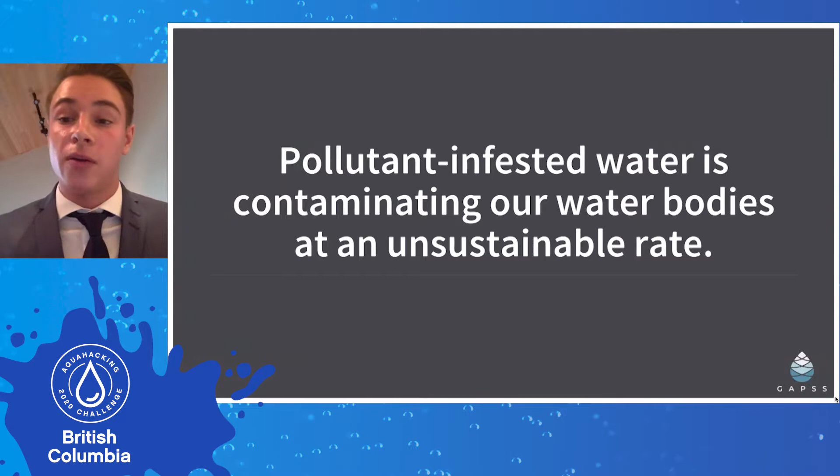But for those of you who live here, or are at least familiar with the Okanagan lifestyle, you know that it is more than just about beauty. The water supports life, it drives our economy, and it ultimately brings people together. But this reality is slipping away. With increasing infrastructure, more and more contaminated stormwater runoff is making its way into our sacred lakes. If we don't intervene now, our lakes could be forever changed for the worse. I'd like to hand it over to Rudy to further explain.

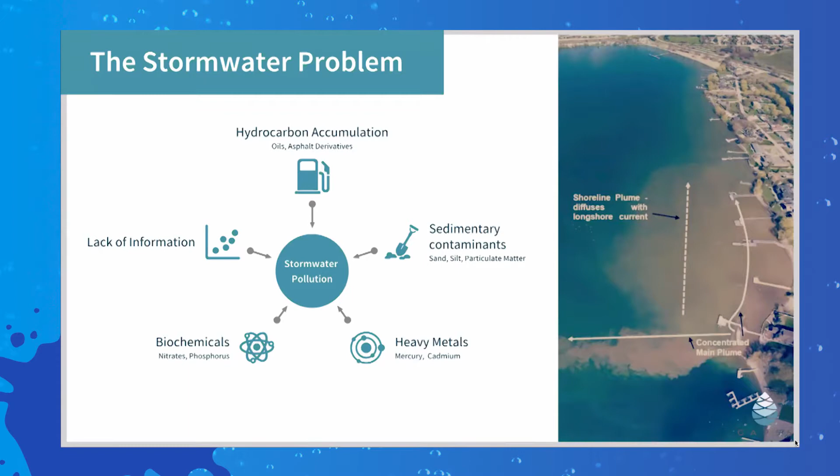So how did we get here? Naturally, stormwater from rainfall should soak into the ground where it joins aquifers. However, due to urbanization, the landscape of our cities has changed, and the introduction of impervious surfaces like concrete and asphalt have made it so that stormwater now flows through our streets where it collects contaminants before entering catchment basins and ultimately converging to central water bodies such as the Okanagan Lake in Kelowna, BC.

Now, hydrocarbons are a pretty obvious contaminant. However, sediment is often overlooked. Sediment is problematic for two main reasons. Firstly, sediment increases the cloudiness or turbidity of the water. This is bad for photosynthetic species which depend on sunlight to produce food, and thereby any other species which depend on them. Secondly, sediment acts as a transporter for other contaminants such as biochemicals and heavy metals that have a tendency to bind onto them.

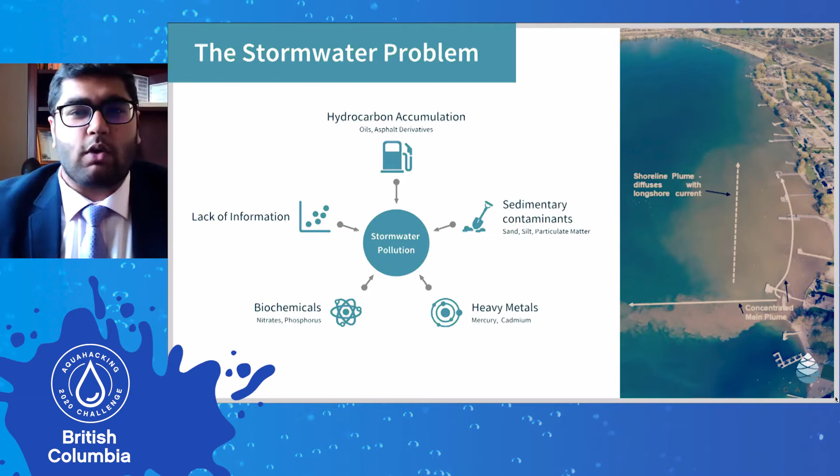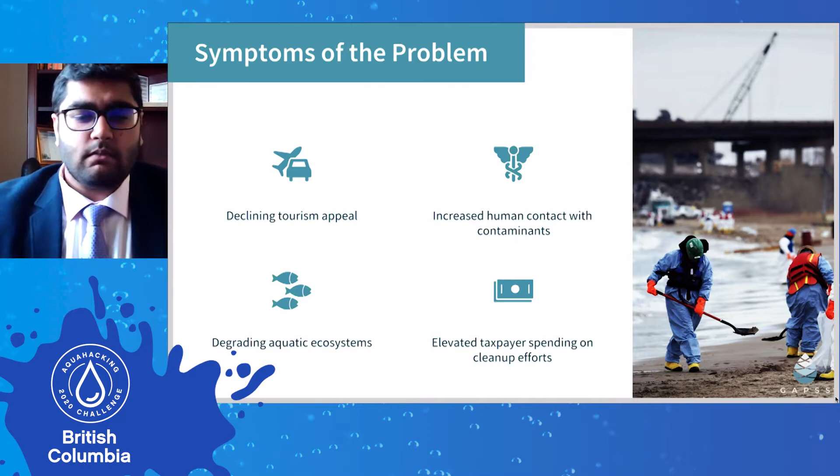Moreover, the lack of data regarding stormwater contamination makes informed decision-making currently impossible. If we continue to let this problem run without intervention, we will see declining appeal of our beautiful BC water bodies, increased human contact with contaminants in recreational lakes, and degrading aquatic ecosystems. Ultimately, taxpayer funding will be required for cleanup efforts.

We present to you our solution, GAPSS, a simple product that slides seamlessly into existing catchment basins. GAPSS performs three main functions. Firstly, it directly removes hydrocarbons from stormwater. Secondly, it directly removes sediment from stormwater and thereby is able to remove any sediment-mobilized contaminants. Thirdly, it records real-time data regarding turbidity and water flow rate through built-in sensors.

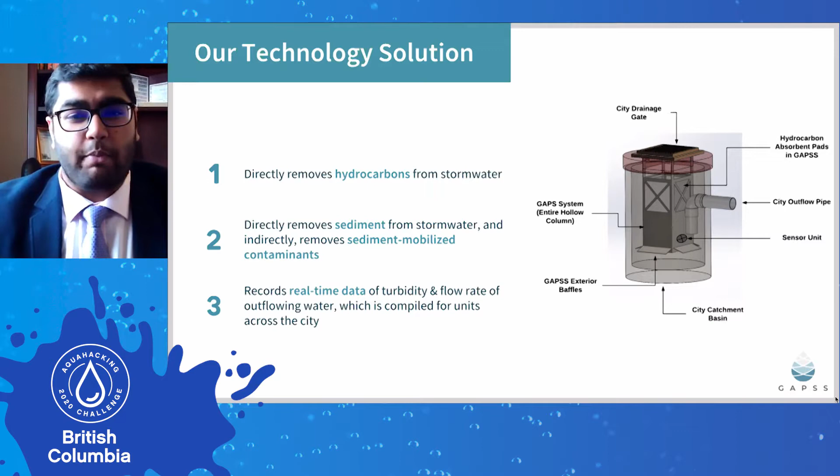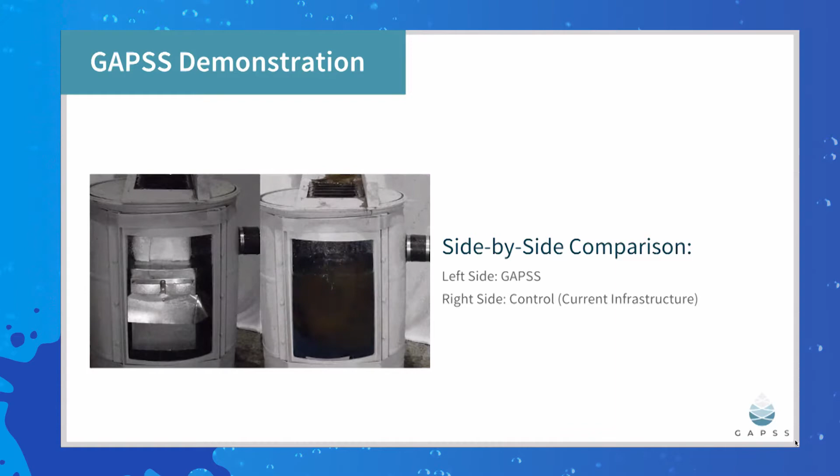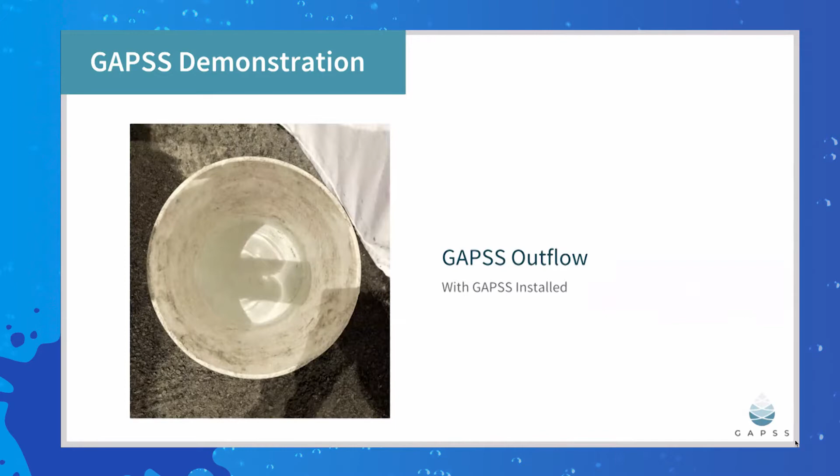A remarkable difference indeed. As social entrepreneurs, we strive to do the best for our society. And through GAPSS, we'll be able to deliver 50 to 80% cleaner water into our central water bodies. We'll be able to remove the contaminants as early as possible in the cycle. Because sediment transports other contaminants, removing sediment as early as possible has a compound effect.

GAPSS is affordable, which means it's accessible for all municipalities, not just the big ones. Therefore, we'll be able to maintain our pristine water bodies province-wide that drive our tourism-driven economy. The data we collect through GAPSS will lead to new stormwater management insights, and it will support critical environmental research.

Our solution is unique. Firstly, it's simple. There's no moving parts, very easy installation, and most importantly, it can be retrofitted into existing city infrastructure. GAPSS is affordable at only 10% the cost of our competitors, while still being effective as it removes 80% of sediment and up to 90% of hydrocarbons. We have synced the GAPSS maintenance cycle with the existing maintenance cycle for catchment basins, which brings the marginal cost for maintenance down to only $5 per unit.

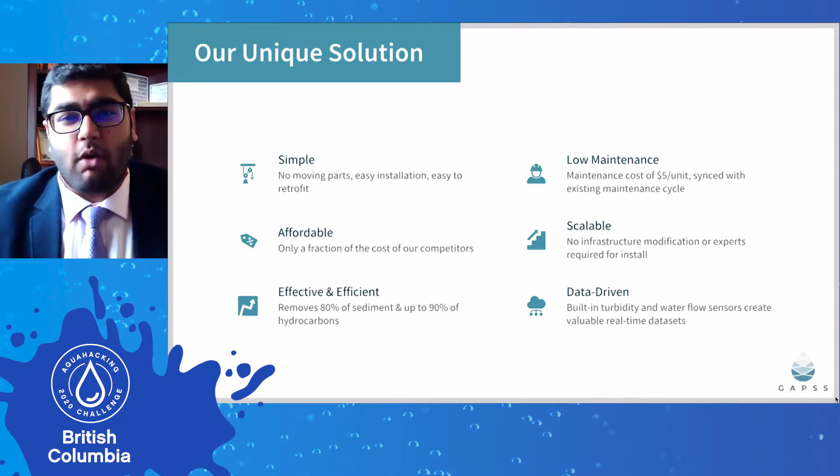GAPSS is scalable. It requires no infrastructure modification and can be deployed flexibly. You don't need to put one in every drain, just the high volume ones. GAPSS is also data-driven, and it's able to produce valuable real-time data sets where in the market there is none currently. I'd like to hand it over to Cole now.

In 2013, Kelowna's annual budget for stormwater management was $85 million. In 2020, BC's budget for environmental protection was $250 million. Our solution is a one-time investment at a fraction of this annual budget. Our business model revolves around two main pillars, the first of which being direct sales. Initially, this will be towards private clients, such as golf courses and resorts, looking to maintain their pristine water bodies. We will move into municipalities eventually.

The second pillar is data packages. These are subscription-based and will be sold annually. The data packages will go towards research groups, environmentalist groups, and government agencies, those who currently lack access to this vital data.

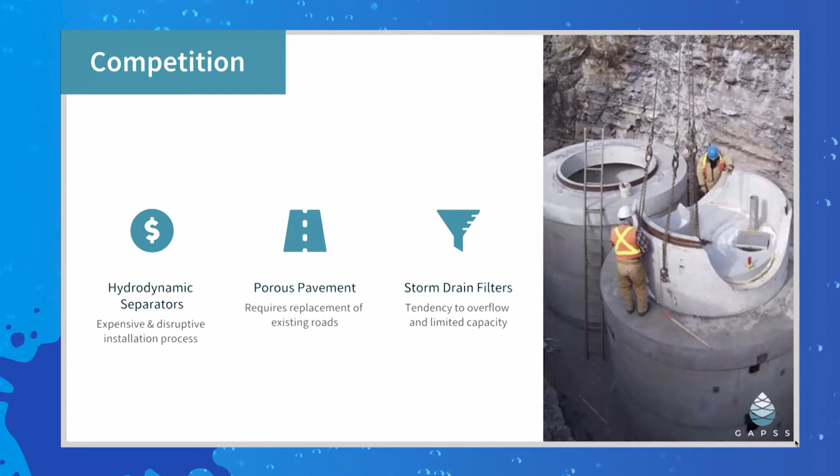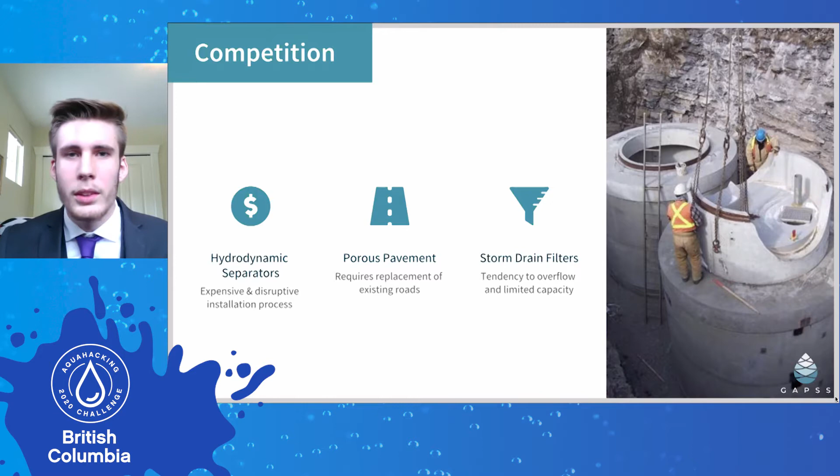Our competition consists of hydrodynamic separators, porous pavement, and storm drain filters. Hydrodynamic separators, such as the Stormceptor shown on the right here, are expensive and extremely disruptive to install. Porous pavement also requires a modification of existing infrastructure, making it infeasible to implement in a city system. Storm drain filters have a tendency to overflow and have a limited capacity. Our solution does not have a limiting capacity and does not require the modification of existing infrastructure.

We have validated our eco-friendliness through life cycle analysis. We have also completed prototyping and SOLIDWORKS modeling to ensure the optimization of our design. In the near future, we will simultaneously conduct laboratory testing and build our software infrastructure. After which, we will pilot a 25-unit network, hopefully in Kelowna. In January of 2021, we will enter negotiations for selected municipalities.

In the first year, our attention will be focused towards product development. This means we will continue to prototype and build our software web application. In year 2, we will move into private sales. We will begin manufacturing as we secure smaller clients. We will also begin negotiation with municipalities during this period.

In year 3, when we have 2 private and 2 medium-sized clients, we will have a final optimized product. The medium-sized clients will consist of small municipalities such as Vernon or Lake Country, and we will use economies of scale to bring down our manufacturing costs.

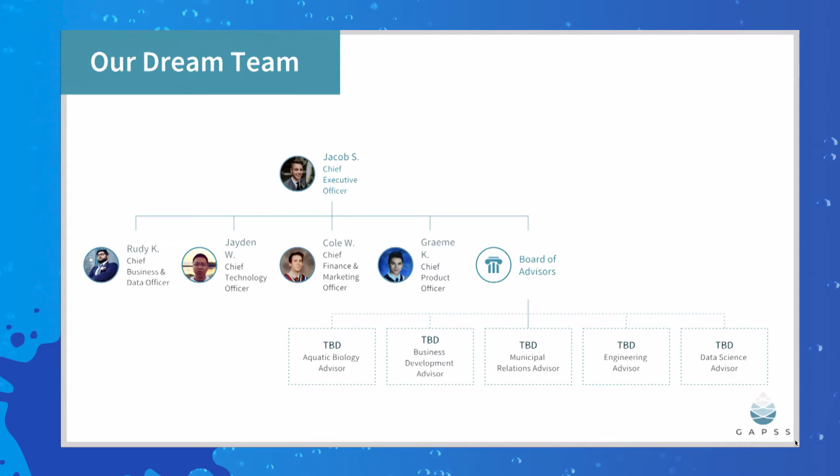I'd like to now hand it over to Jacob to talk about our team. So here we have our dream team. On the left, you can see our current team. And on the right, we're showing that we, in the future, decided to implement a board of advisors. This board would include experts in various fields that would help us maximize our impact.

Thank you very much for your attention. And now we'd like to open this time up to any questions. Great, thank you, Team GAPSS. And we will now have 10 minutes for the judges to ask any questions of Team GAPSS.

I'll jump in to begin with, if you like. So the business case and the benefits are quite clear, well set out. I think just in terms of the functionality of the unit and how it works, it would be great to hear a little bit more about that. Yeah, absolutely. I think I can speak to this topic for you. So we really address 2 types of contaminants principally.

One is hydrocarbons. Our system consists of a hollow column, which allows water to flow through it, but water is maintained at a certain level. And we have hydrocarbon absorbent pads, which are placed at the water line. Through density, hydrocarbons rise to the top, which allows them to be absorbed without restricting any flow of water. Secondly, we promote sedimentation of any contaminants within the water by altering the fluid flow through the system.

In that way, we don't actually present a membrane that filters out certain things, which would be constrictive of water flow. Instead, we just change the way in which it flows by slowing it down in such a way that it promotes sedimentation, which gets rid of the sediments before the water has an opportunity to rise back up and exit through the effluent pipe. Very good. Thanks, Rudy. Thank you.